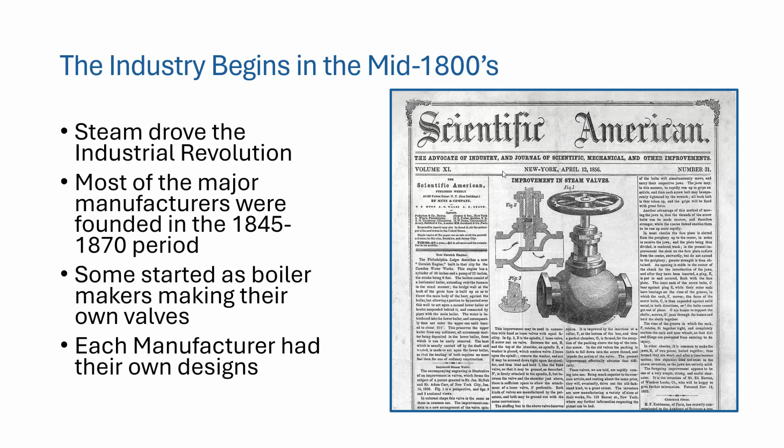One of the issues was each manufacturer had their own design. Everything was different. They were different lengths, different sizes. The threads were different. Nothing was interchangeable at all. So it made it difficult if you bought a boiler from manufacturer A and then wanted to add on to it or do something different, nothing fit. So there was a real need for standardization. It was actually slowing down the growth of the Industrial Revolution.

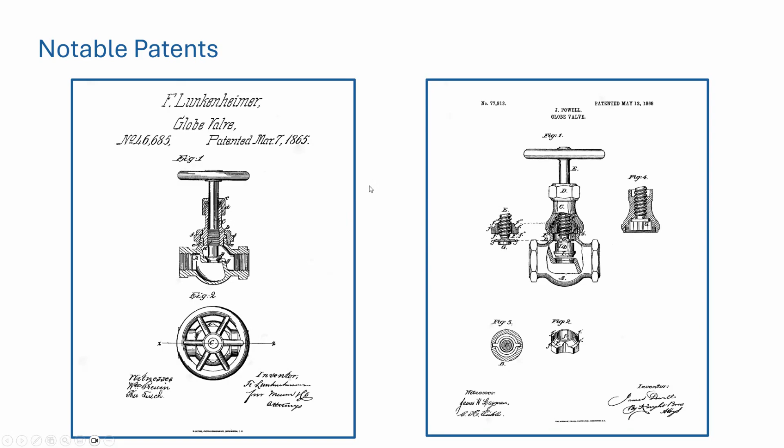Looking at a couple of patents here, these were two of the major manufacturers, Frederick Lunkenheimer on the left and Powell on the right. These were the first patents they achieved. The one on the left, 1865. The one on the right, 1868. Things were starting to roll at this point, to the point where these folks wanted to patent their designs. Again though, nothing is standard. The threads, nothing. So they are growing fast. They're doing a good job of marketing, but nothing works together very well.

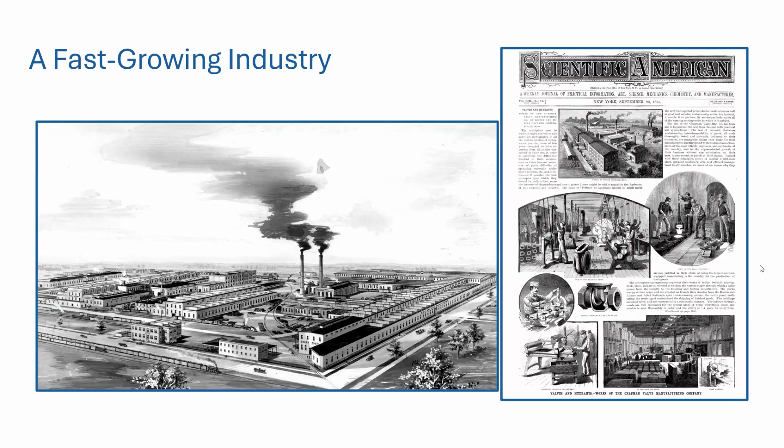This is one of the large manufacturers, a picture of their plant during the time. You can see it's probably spread out over 30 acres or so. And looking on the right there, we see a Scientific American from the 1880s, and you can see the cuts of the illustrations showing the inside of their plant right there. The scope is really growing for the whole industry because it's all driven by steam power, steam engines. Steam is running everything, locomotives, steamboats, but probably bigger still, it's running the individual plants and providing energy to run all the individual plants. But there's problems happening at this point.

Everybody's working fast. They're making these things and doing the best they can in most cases, but they're not really experienced enough to understand what's happening to the materials and some of their designs. So there's a spate of boiler explosions. The worst one was the Sultana explosion in 1865, and over 1,000 people were killed because the boiler blew up inside the steamboat.

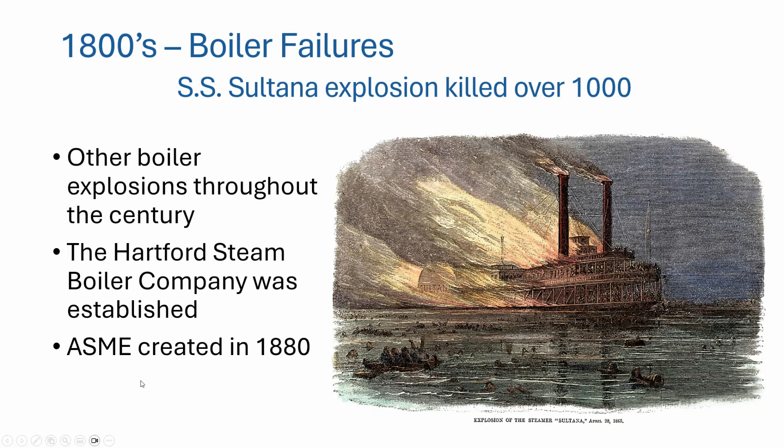So a group of insurance people got together with manufacturers and created a company called the Hartford Steam Boiler Company. They were an insurance company, insuring the boilers and the facilities in which the boilers were located. As an adjunct to that, the American Society of Mechanical Engineers was created in 1880 to also try to work on these problems. They developed a boiler testing standard in 1884 and a pipe thread standard in 1885. So that was a good start right there.

They could at least standardize the testing of these boilers, which did contain a lot of valves, and they were able to thread other pieces of equipment to them because they standardized the threads. But still, the problem was not completely solved on the boiler side. There were still explosions and still issues with that. It wouldn't be until 1914 that the American Society of Mechanical Engineers created the Boiler and Pressure Vessel Code. It was very good for boilers directly, but it didn't do much for valves. The only thing covered in the original Boiler and Pressure Vessel Code were relief valves, pressure relief valves.

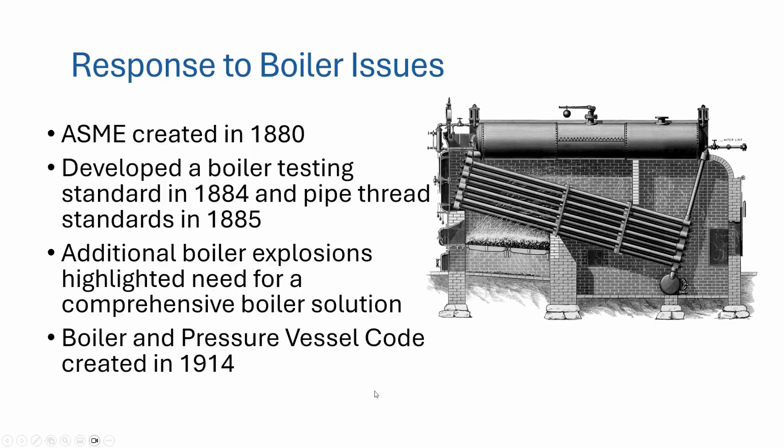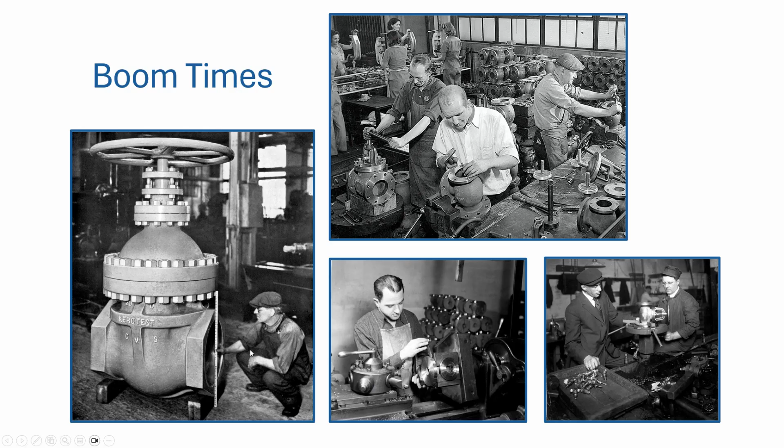About this time, the manufacturers were kind of up to their necks in problems here because there were so many manufacturers, and they were selling, and one manufacturer would get part of a job, another would get a different part of the job, but nothing was fitting together because there was no standardization.

So a group of manufacturers started what was called the Valve and Fitting Institute in 1898, and it ran until about 1910, but didn't get a lot of traction. Then they changed the name and scope a bit, and the new organization was the Committee of Manufacturers on Standardization of Fittings and Valves. That was 1911, 1913. Then another change was the Valve and Fitting Manufacturers Association in 1914.

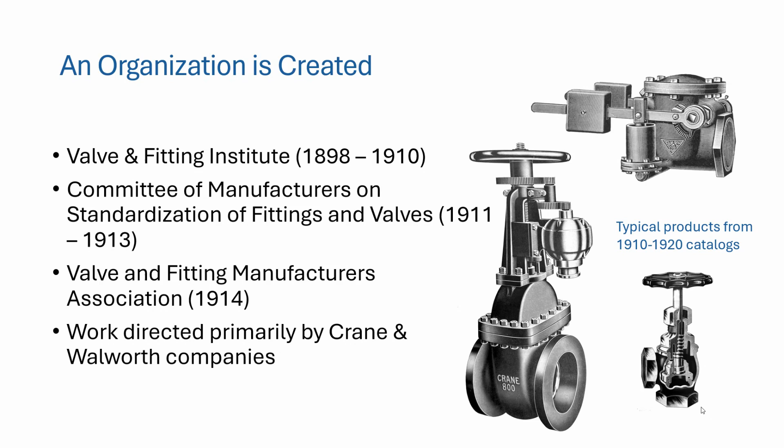Most of this work was directed by some of the very large manufacturers, in this case particularly the Crane Company and the Walworth Company. Crane, by the way, would be the largest valve manufacturer for nearly 100 years. So they were making some traction here, they started the organization, and it was gaining traction.

The first document created by this group, which would later become the MSS, Manufacturer Standardization Society, was a flange standard for extra heavy companion flanges. What that means is these flanges had threads on the inside and were to be threaded onto pipe, and the pipe would then have a flange on the end so it could be assembled and disassembled. The dimensions for these flanges are very close to one of our sizes and pressure classes today, which is Class 300 in the ASME, American Society of Mechanical Engineers, B16.5 document.

So now that we've got a start here, we've got some flanges. Everybody knows what size they're supposed to be, what size the bolt holes are supposed to be, and it was a good start. There's still no official organization handling all this.

These dimensions were usually provided by each manufacturer on their letterhead and sent out, and they were made free of charge - didn't have to worry about paying for them. They were used as a marketing tool.

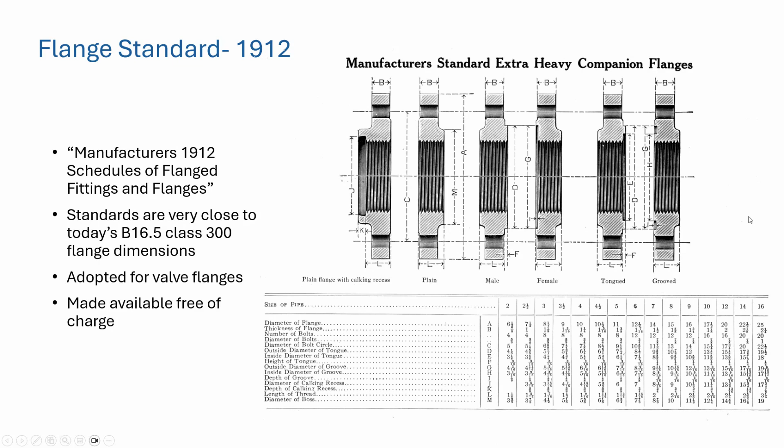World War I started changing things, and the war really put the focus on standardization. The War Industries Board and the Emergency Fleet Corporation were involved with the production of merchant ships and Navy ships. There was a big issue because now you've got all of these different manufacturers making products, and they're all going on the same ships. One end of the pipe coming from a boiler and maybe going to a pump, it's not the same on the other end. So it really did complicate things as far as manufacturing ships.

But there would be a lot learned from World War I, and all these steps, procedures, and policies would come in very handy in World War II when the arsenal of democracy was put into place.

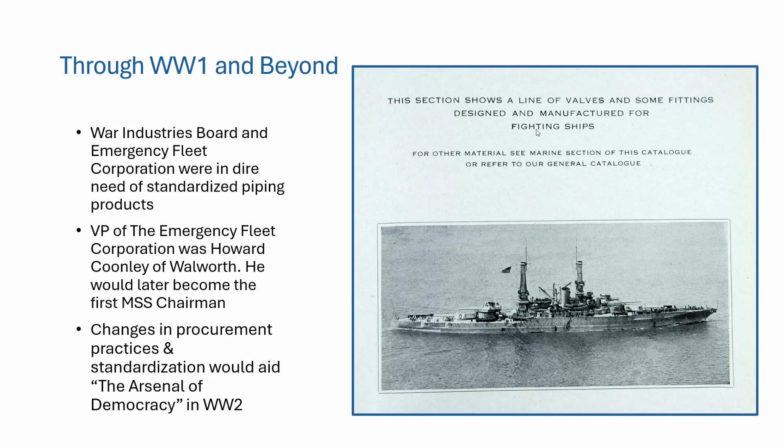In 1924, finally, the Manufacturers Standardization Society of the Valve and Fittings Industry becomes reality. They were also a charter member of the American Standards Association, ASA, which was the largest standards association in the country at the time. They created one of their first documents - it didn't even have an MSS number, but it became part of a very, very common American Society of Mechanical Engineers document, B31.3, a piping document.

And it wasn't just that one ASME document. They also were involved in providing the data and all of the verbiage that went into many of the original B16 documents, which are the design documents as a whole that are used for designing valves and a number of other things.

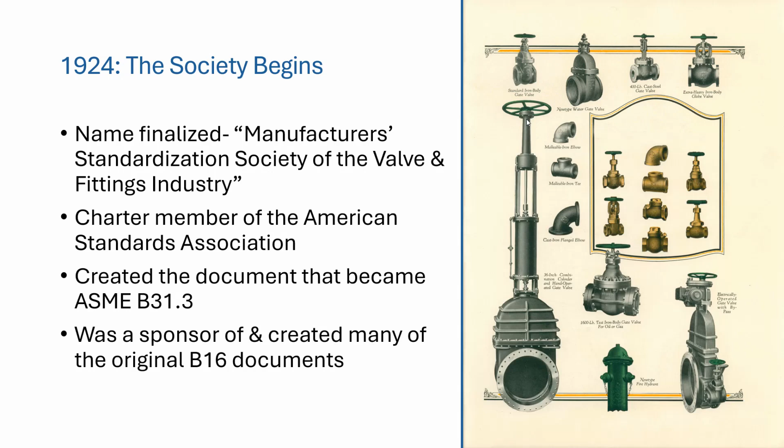Steam is still driving the industry. It is a steam industry. That's where most of the money is made, although they're making a lot of valves for water as well. But the bigger, higher pressure valves are all utilized at this point for the steam industry, and designs and requirements all come from that industry.

On the left, we see a familiar face. That's Thomas Edison at the 1922 electrical show, and he is opening this valve. I guess it's symbolically making something happen at the generator station somewhere, but it does show the importance of valves in the generation of electricity.

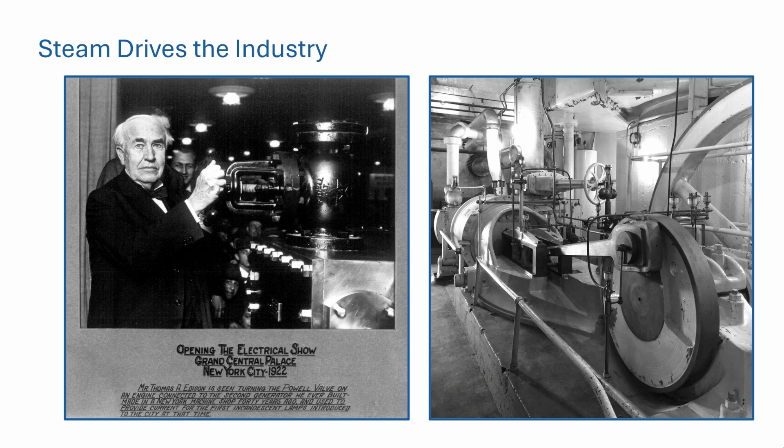On the right is a typical steam engine, and you can see it right there. There's a big pipe in the middle in the back, and that comes from the boiler. There's a very large gate valve back there, and looking at the handle design, it's made by the Chapman Company. So that steam is coming in and it's powering this big engine right here, the piston moving back and forth, with a very large flywheel on the right. Steam is driving the industry.

One thing that happened during this time that was very important was the creation of pressure ratings. MSS, while they weren't the actual hosting body for this particular standard, did most of the work, and it was published by ASA in 1927. This actually created pressure ratings and classes for these pressure ratings. As you can see, except for the 150, they were all based on 750 degree operating temperature of steam. The 150 was an outlier, designed primarily for some of the transportation boilers, such as on steam locomotives.

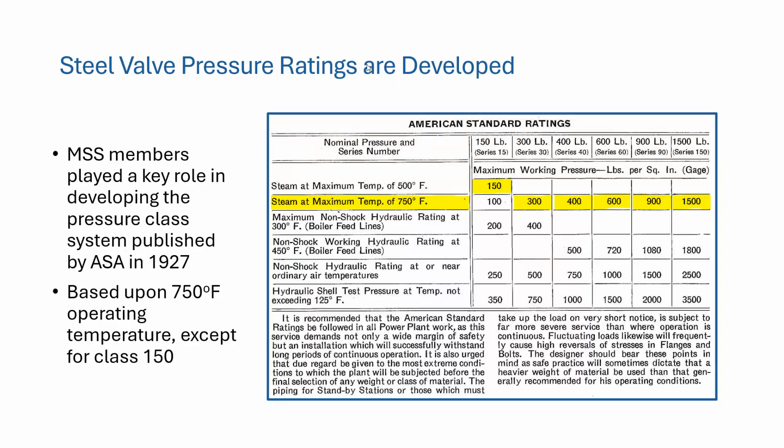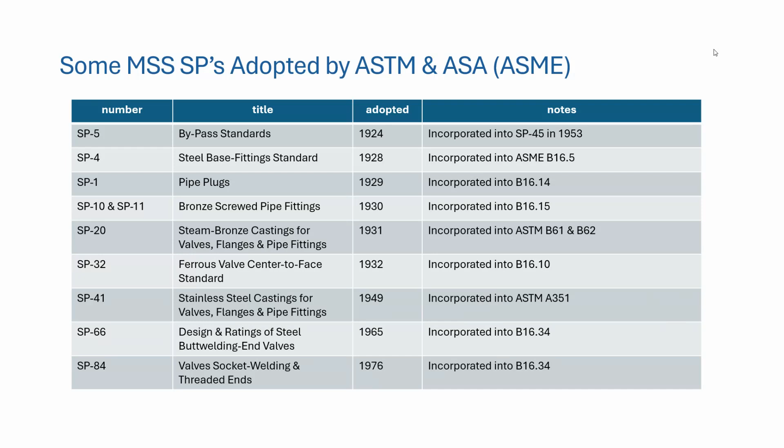This is a list of just some of the MSS standard practices that were adopted by ASTM and ASA, which also was ASME at this point. You can see on the right there's a number of them, some very important. To me, the most important on the page is the SP66 down at the bottom, and we'll talk about it later, but that was in 1965. So MSS worked very closely with other organizations. We were very proud of our work, but we weren't too proud to share that work with a larger standards body or organization that had a bigger footprint.

Business is really booming now. We're primarily in the 20s, and you can see on the left, this was the Crane Company in Chicago. This plant was an integrated plant on 67 acres on the southwest side of Chicago. They had all their own foundries in there, making their own steel, bronze, and iron. The middle building was the plant administration building, with a beautiful clock tower on top.

The problem with all of this was, first of all, it was very valuable real estate later on, but also, as with many other buildings from that period, it was full of asbestos. So by the late 60s, 1970s at the latest, it was torn down. Everything is gone now. That was the manufacturing part of this particular company.

But if you look in the middle there, the 888, that was the address on Michigan Avenue in Chicago for the Crane Company. And if you walked in the door, that picture at the bottom is what you saw. This gigantic 84-inch valve was sitting right in the middle of the lobby, and you walked around it on the stairs to get up to the different levels.

Marketing was also a big deal during this time. The companies were flush with money, so they built showrooms in major areas of the country. The one on the right, with the gentleman standing in the middle of the valve, was the Crane showroom on the Atlantic City Boardwalk. This valve was actuated by electric motors, which you can see up there on top. I have a video of this opening and closing, but this was a very expensive entrance into their showroom in Atlantic City.

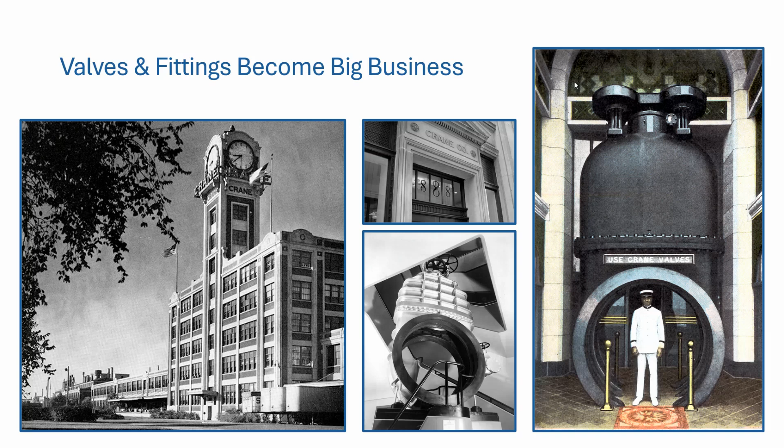But things don't always stay at the top, and business is not always growing every year. The Depression hit, and it had a very strong effect on the valve and fitting industry, like it did on every other industry. During that period of the 30s, one MSS meeting was canceled, and they didn't produce a lot of standards, only 18 for the 10-year period, although 3 of them were very important: SP6, SP9, and SP25. SP25 was the most important, a standard marking system for valves, so now you could at least look at a valve and compare it to another valve of another manufacturer and know that the information was going to be on there, as it was a requirement.

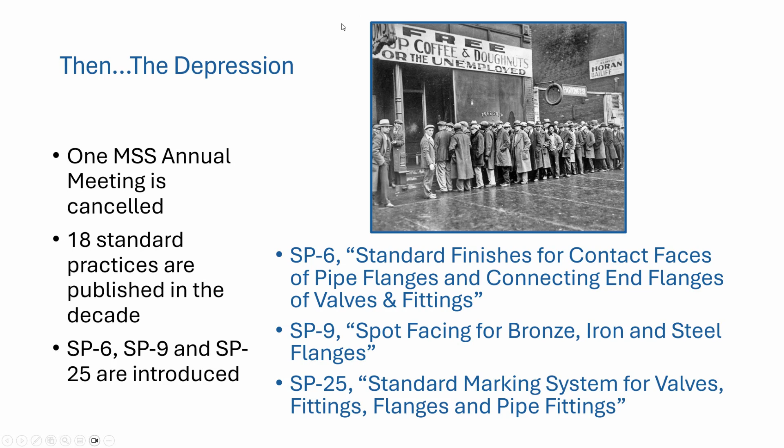So we were going through this depressed period, which really slowed all industry down. But there was a light at the end of the tunnel. Unfortunately, it was Europe and Asia that were burning. Right before the Japanese bombed Pearl Harbor, the United States began working in earnest to build up their arsenal of democracy, starting in about 1941. Production priorities were all focused on defense, including items such as shipbuilding and things of this nature.

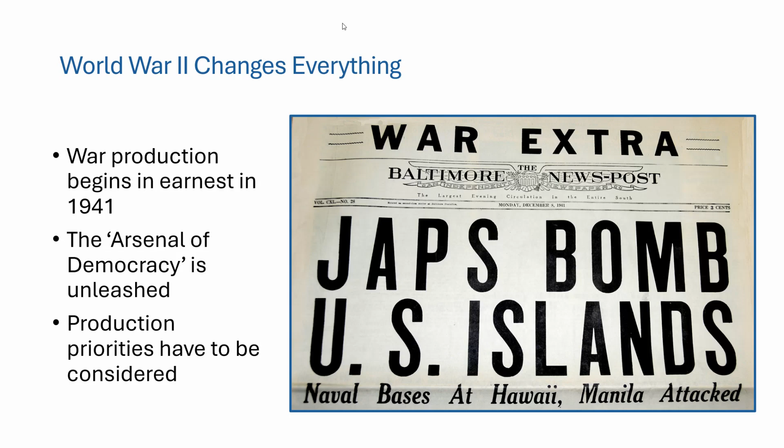During the war period, production had to be regulated and controlled because in the valve business you had all these manufacturers making everything. Every manufacturer seemed to make every type and material of valve. But what the War Production Board needed was lean production. So they established rules which restricted manufacturers. They would pick manufacturer A and say, you're going to make steel valves of this size. Manufacturer B, you're going to make iron valves of this size. So there were controls, and even some sizes were temporarily suspended - they weren't allowed to be made.

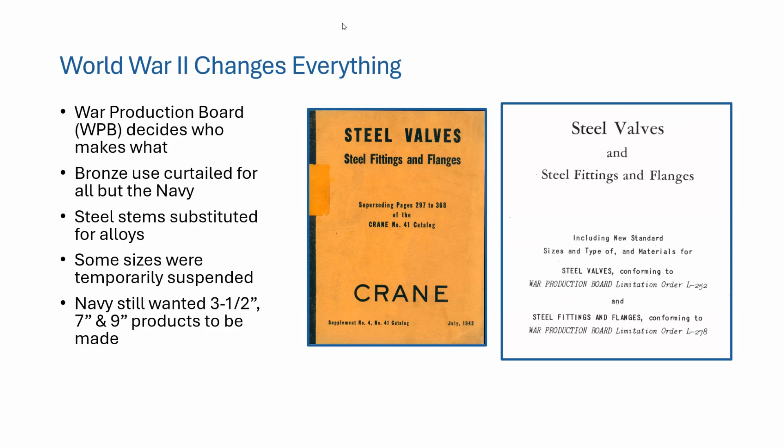Although the Navy still had some very unusual sizes, 3.5, 7, and 9, because they had ships in service that had been built from the turn of the century up through about 1915, and they had some of these odd pipe sizes in there.

This is a catalog from the period, and you can see it's got the big X's marked out. Rather than redo every single page, some manufacturers just X'd out this information, and essentially this is what this manufacturer was not allowed to make. So in this case, this particular product line, there was no way they could manufacture that, because they were supposed to be making, in this case, maybe steel valves of different pressures and materials.

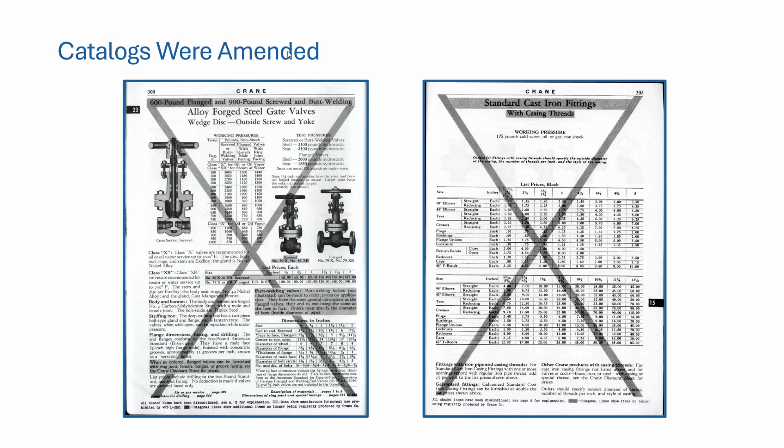The war also created a lot of opportunities for valve and fitting manufacturers. This is just one particular case. What you see here is a letter from the War Production Board, and essentially it is an initial purchase order for 100 sets of these valves to go into a number of ships.

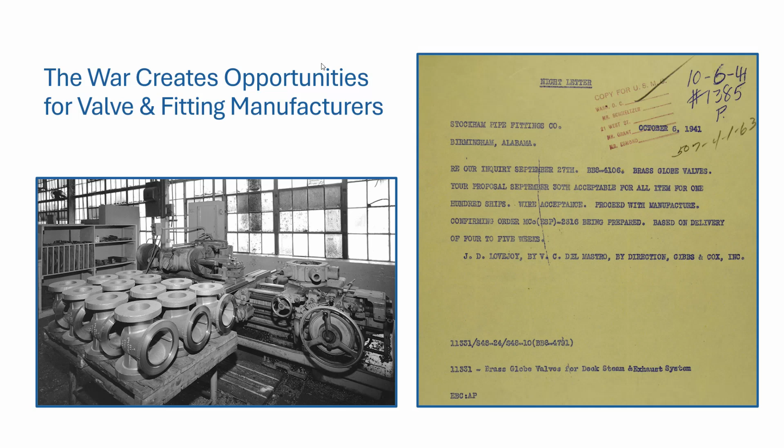In this case, these were probably Liberty ships based on the quantity. So this would be like the initial letter. And if you're a manufacturer, this is great, because this is good business. It's good repeat business, and you're in the production line business, so it's the kind of thing you can make money on. A lot of the manufacturers did very well during this period.

This is just a close-up of that particular inquiry and purchase order. You can see right there, your proposal is acceptable for 100 ships. That is a lot of valves, and that's a lot of money. And they were really pumping things out because you can see delivery of 4 to 5 weeks.

The picture on the bottom shows the company where this work was performed - this is the Stockham Company in Birmingham, Alabama. Their foundries are located here on the bottom of the picture, bronze and iron foundries. So they did very well, as did most all of the manufacturers of valves.

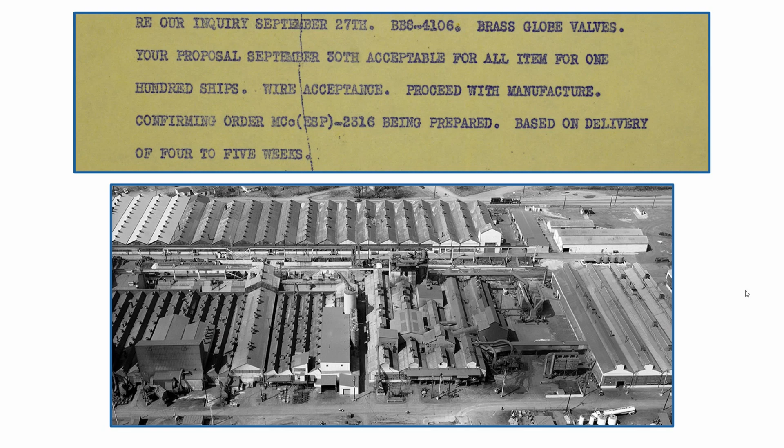In fact, there was so much valve work to be done, many companies began during this period, and a lot of companies manufactured valves that had never manufactured them before because the need was so great. So again, it was good business.

This is a warehouse out in Northern California, and what you see on the left is a typical Liberty ship. These were ships designed to last 5 to 10 years, and they would help us provide materials and get them overseas very rapidly. And on the right, these are a number of what's called ship sets, and this would be all the valves used on one particular ship. This is probably a number of ship sets.

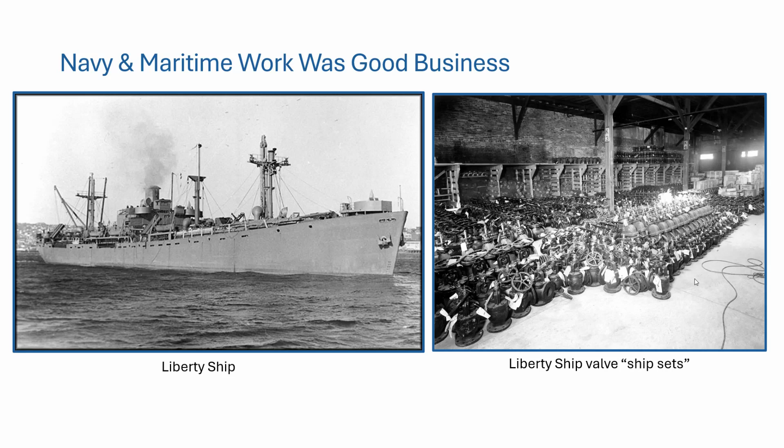That's a tough one to say. Ship sets, you can see over there in the warehouse. So again, this is big business, and it's very profitable, but it's very focused, because the manufacturers couldn't really expand their product lines. They had to make what they were told to make by the War Production Administration and the different boards and groups.

Another industry that was created during this time was the pipeline industry. In the early part of the war, 1942, the first 6 months especially - this is after the U.S. was in the war and Germany had declared war on the United States - U-boat submarine activity was sinking many of the tankers bringing oil and gasoline from the Gulf Coast up to the Northeast: Philadelphia, Boston, New York, and that area. So what we needed was pipelines, plural.

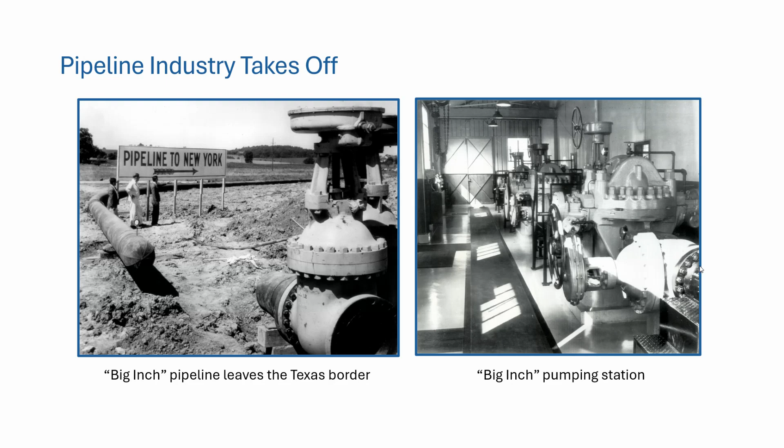On the right is a typical pumping station of the period, loaded with valves again. It was good business, and it really kicked off the pipeline industry in the United States.

Okay, the war is over, and now the peace begins, and it's time to get back to work. You've got lots and lots of men coming home, and they need jobs. There's concern of recession as the industry of the United States switches from a wartime industry, very restrictive, to a wide open peacetime industry.

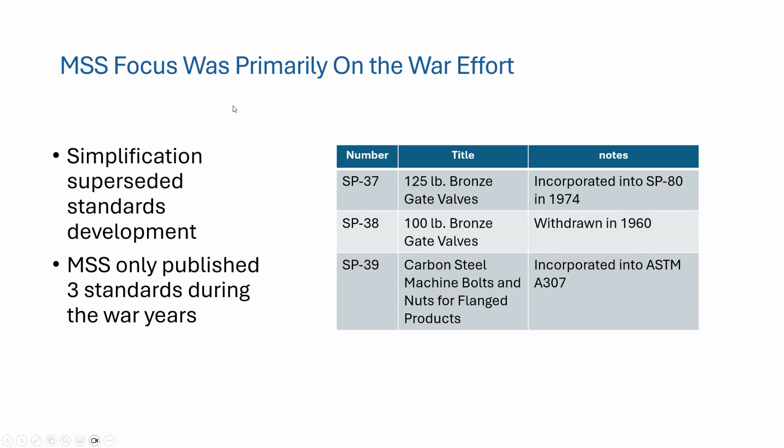During the war years, MSS really just concentrated on simplification and production. Not a lot of MSS standards were published, actually only three, and these were eventually incorporated into other standards. Actually, one of them was withdrawn. So MSS was busy helping to win the war and not doing a lot of standards creation during World War II, but it was a huge boon to the industry.

New materials were created, and the one we're going to talk about in just a minute is Teflon. New industries were also created, such as the nuclear industry, and that would be a very big one. Valve designs, there were new designs created. As a result of the Teflon, the ball valve industry would be able to take off, and that happened in the 50s. And then we also had the pressure seal design, which was very effective in saving material.

But another thing as a result of the war, you had this manpower now, and all of these young men, they started out as kids, 17, 18 years old, and they went through the war, and they brought a new attitude back to the workplace. They had a maturity, and they were more serious. So you had a better workforce, which really helped in focusing on production and working and doing the job right.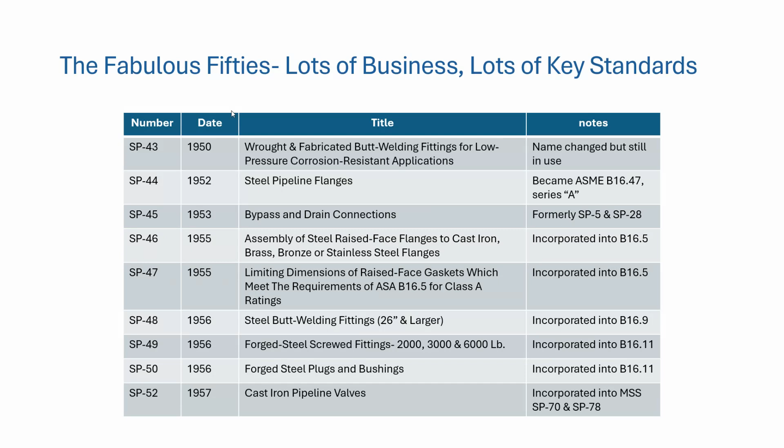At this time, going into the 50s, with the nuclear business and its footprint, we needed some standards that address quality. And we created in MSS three of the longest standing standards. They're still published today, and they're still very, very effective.

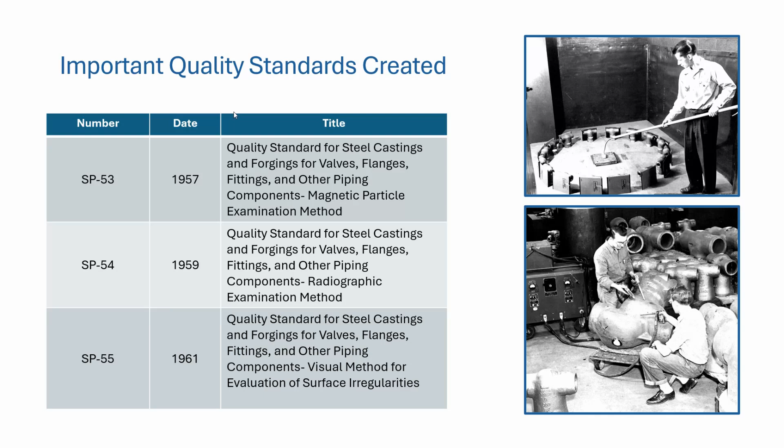One was for magnetic particle examination, which is what you see on the bottom right. The one in the upper right is radiography. And a third one was a visual inspection of the surface condition of the material. So these were very, very important, and they came out of the requirements for the nuclear industry, which was becoming very important in the U.S.

Rickover's nuclear navy, which also the nuclear part of it came out of World War II in the Manhattan Project. The nuclear navy had very, very special valve requirements, and Hyman Rickover was a stickler for detail and quality. And a lot of this actually bled over into standards and specification for the overall valve business.

The big project initially was the USS Nautilus, and that was kind of the test bed for nuclear navy and nuclear-powered ships. But this morphed fairly seamlessly into nuclear power plant construction. The Shippingport, Pennsylvania power plant was the first one constructed, and a lot of the initial work was taken up by Rickover's group of people.

In order to provide valves for the nuclear applications, ASME created what was called an N-stamp, and this was a very, very detailed specification and procedure, and you had to be audited in order to get this stamp, and you had to have the stamp to make a nuclear valve. So that was a very big deal. Probably a half a dozen of the larger major manufacturers during this period had N-stamps, and they were involved in the nuclear industry.

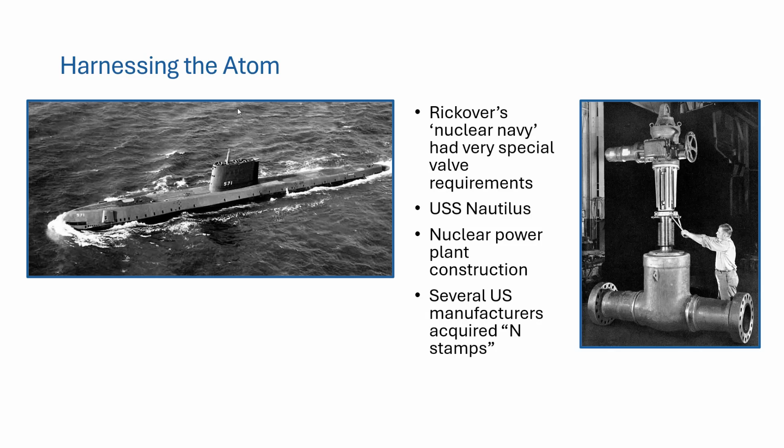For a long time, going back to the mid-30s, the industry had been trying to create a standard for testing valves. You would think that should be very easy, but they just could not get agreement on it. A VMA technical committee worked on it during World War II, and you would have thought for the goal of winning the war, perhaps they could come to some agreement and create a document. What the problem was, they could not agree on leakage rates. That was the problem.

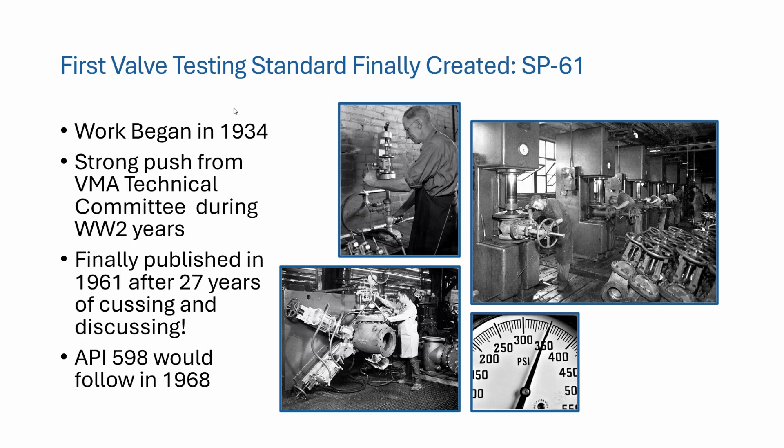Finally, after 27 years of cussing and discussing this issue, MSS published the first valve testing standard, SP61, in 1961. Seven years later, the American Petroleum Institute would follow with their testing standard, API 598, which would eventually take some of the load from the SP61 standard, although it is still used a lot today.

Oh, the Great Teflon War. This was the birth of the ball valve.

Teflon was invented by DuPont as part of the Manhattan Project, and it was an accidental development. They were trying to do something else, but they created this material, which today is being discussed a lot because of PFAS, which is a material that's not good on the body, and we're trying to ensure that that does not go into the valves and fittings and pipes that are being made today.

But anyway, here is the initial birth of the ball valve, which is a huge player in the industry today. Looking on the left, you can say, well, 1871, that was the first ball valve that was patented. That's true, but it was a metal design, and every time you opened it, you scratched the ball. So it was not so good and didn't last long and was not utilized.

The one in the middle was designed in 1942. That's when they filed the patent. And this was the Crane Company in Chicago. And they just kind of sat on this for a while. I had a friend who was in the engineering department during this time, and they had a meeting discussing this particular design. This was probably early 50s, 52, something like that. And they said they could see no commercial advantage of creating a ball valve like this. So they decided not to manufacture.

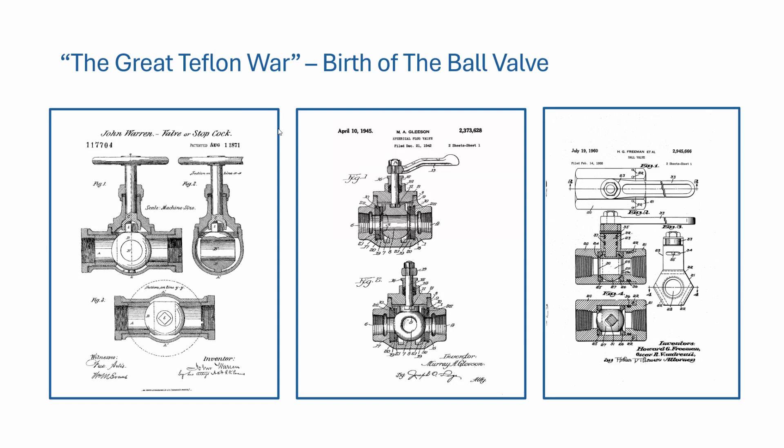Rockwood Sprinkler and Howard Freeman did a lot of work for the government. In fact, he invented the fogging adapter that went on hoses to put out fires on ships. So he was involved in valve construction and design. And with his connections in the Department of War at that point, it wasn't the Department of Defense yet, he got wind of the Teflon product, and he was the first manufacturer to utilize that.

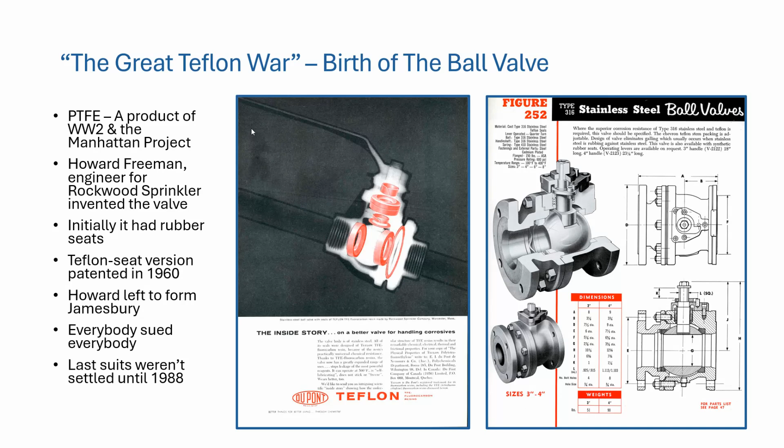His initial design had rubber seats, but the Teflon became the de facto standard for that. He left and formed the Jamesbury Company, and then everybody started using Teflon seats. Everybody was suing everybody, all of the ball valve manufacturers initially, and it wasn't until 1988 that all these suits were settled. But it was a huge, huge event in the history of valves, and MSS was right in there providing standards for that. One of the most important standards that MSS did create was SP66.

And until butt weld valves, which are like those on the right, which are designed to be welded into a piece of pipe as opposed to bolted, until that point, the method for rating the valve pressure was based on a flange standard, ASA B16.5.

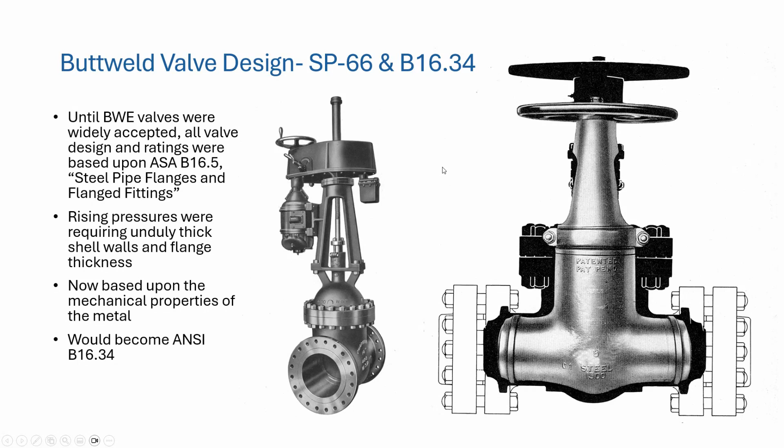But as the pressures in the steam service and refining services rose, it was requiring valves with gigantic flanges on the bodies and the bonnets and the ends. So the pressure seal valve was designed. The problem was there was no way to rate the pressures that it would handle. So a group of MSS engineers worked on this, and they created a standard that was based on the mechanical properties of the material, and that was MSS SP66, which eventually would become the ASME B16.34, which is the primary design document for valves today.

Another situation that arose was pollution and pollution control. Big event, 1948, was the Donora smog. This was in a suburb of Pittsburgh that had a lot of heavy industry in it. And they had a temperature inversion back in 1948 over this area.

And so all of the toxic effluent and smoke couldn't go anywhere. It just rose up to the cloud cover, which was about 2,000 or 3,000 feet. And it was so bad that 20 people were killed and thousands were actually made sick by this. So this got the attention of the government and manufacturing and people all over the United States, and it eventually would result in the creation of the Clean Air Act and other organizations that were fighting for clean air.

Also, what came out of a little bit later time frame, going into the late 1980s, they're concerned about fugitive emissions and air quality. But what happens also with that problem, it's a double whammy.

Asbestos becomes a very big target because the same properties that made it a very good sealing material also made it likely for fibers to rest in the lungs of people around it. So by 1990, there was a requirement for control of these fugitive emissions, and we had to use completely new materials. That was going to require new standards and specifications.

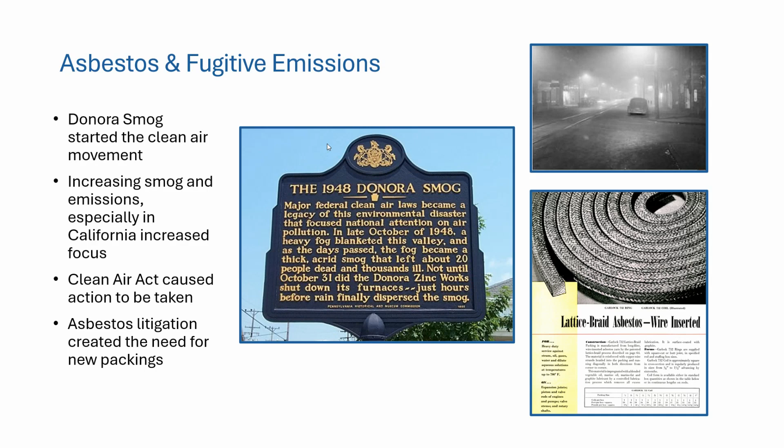MSS was the first organization to create those specifications with SP120, for flexible graphite systems for rising stem valves. Essentially, it was a standard for graphite type packings, and it enabled everybody to standardize and raise the quality of all these seals.

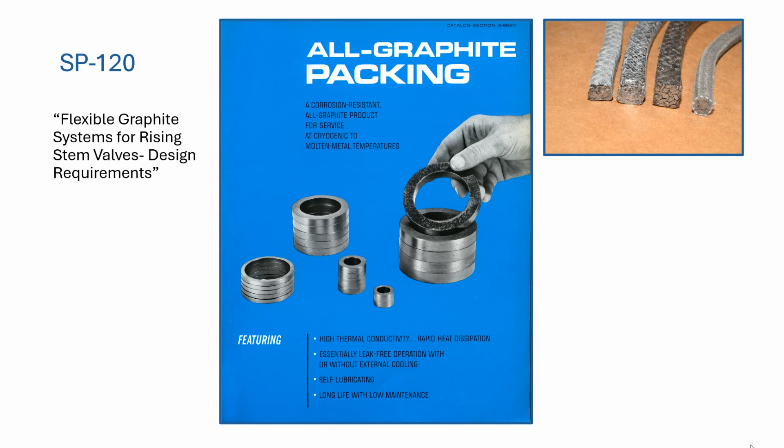MSS followed that up with SP121, a way to qualify the actual material. You simulated a service situation, heated the fixture up, and ran it back and forth. The data and information, basically the skeleton of SP121, became API 622, which is the de facto standard for fugitive emissions testing today.

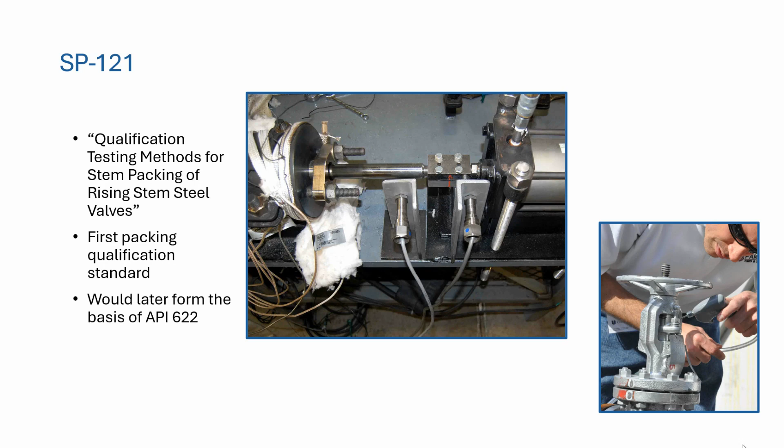Another solution that was proposed, a very good but expensive one, was mandated initially in California for valves under 2 inches, and eventually for all valves. They required what was called the best available control technology, and the PhD from Harvard running this felt that bellows seals were the best available control technology, so they wrote the requirements in there.

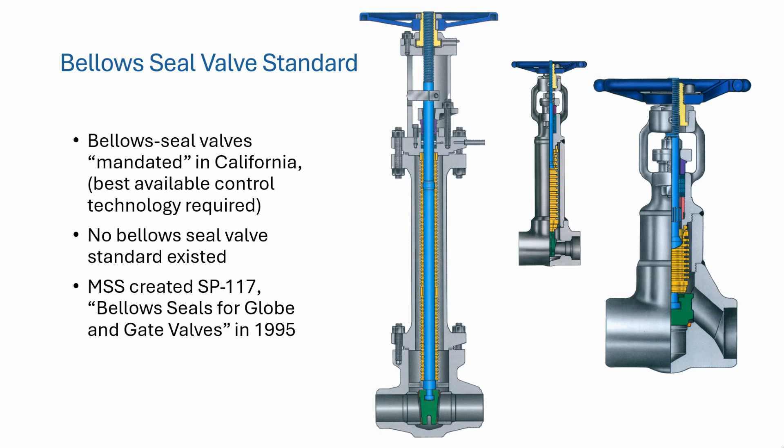However, there was no standard for bellows seals. So to fill this void, MSS created a very valuable and timely standard, MSS SP117, bellows seals for globe and gate valves. This was published in 1995.

As we got close to the turn of the century, we looked at other areas that needed standards and specifications. MSS was approached by the pipe hanger group, who said we need standards and specifications to cover the hangers important in piping, refineries, and other industrial facilities. So we created a new Committee 403 on pipe hangers. Since their creation, they've been very active, creating standards used worldwide, and becoming one of the most important committees in MSS.

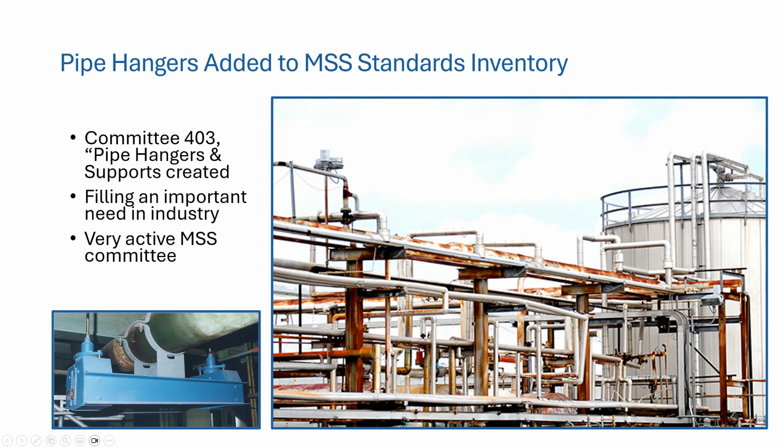Our membership has essentially mirrored the economy. When things are really bleak or depressed, we tend to lose some members. But for the last 15, 20 years, we've been on an upsurge, and we're over 120 members right now. So it's a very viable organization, and it's continued to grow as the years moved on.

We still do that today. Since 1975, the meetings have been held in Florida, because most of these companies were up in the Rust Belt or the Northeast, and it was cold there, so they wanted to get down into some warm weather. After the first Florida meetings became very popular, all of them have been in Florida since '75. However, this year, 2025, will be the first time we meet outside of Florida, in a warm spot in Arizona.

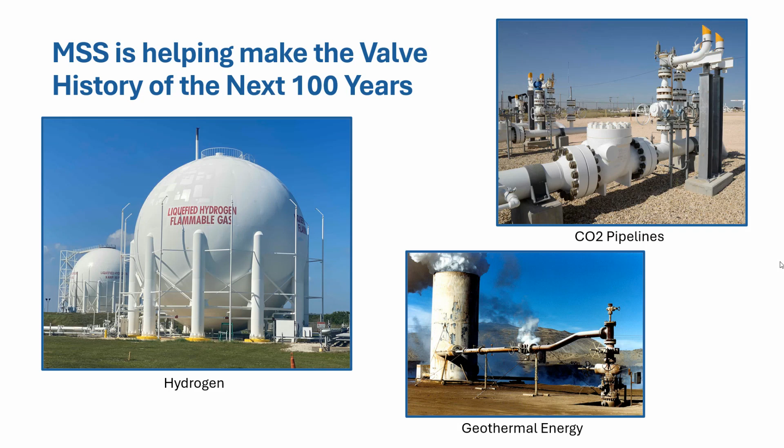So the organization has made it for 100 years, and it looks like with the input of all of the great people we have in the organization, the next 100 years look pretty well for us as well.